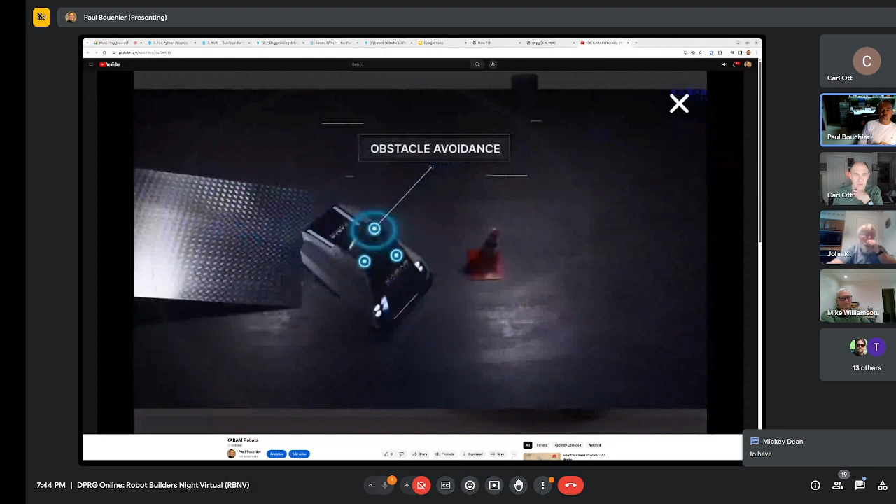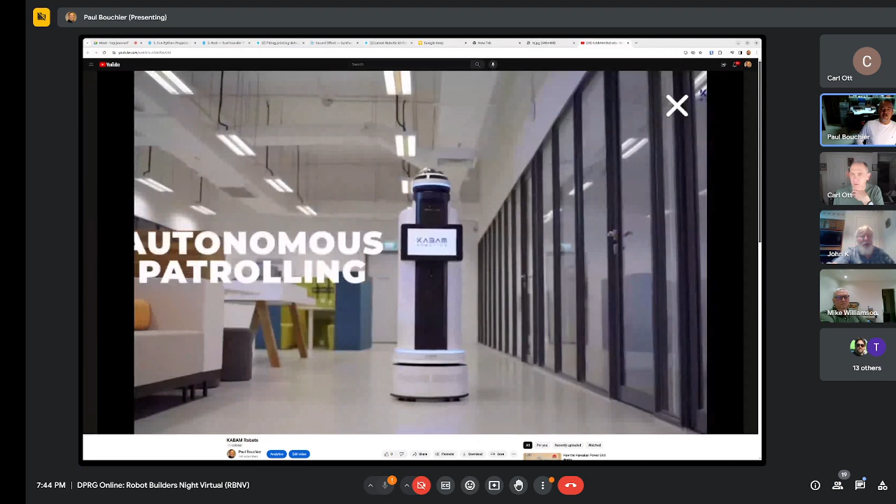Yeah, so I just excerpted a few things from Kabam's website, but Kabam is a Singaporean company that manufactures two security robots, and their VP in the US is going to come and talk to us about the robots on Saturday. So please come to the meeting and or dial in. He'll also be inviting us to come and visit their experience center in Irving. So this is their indoor robot.

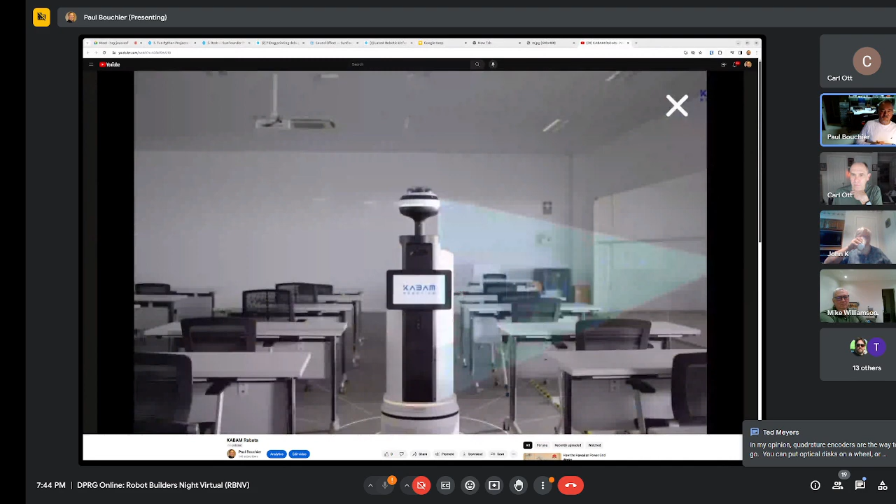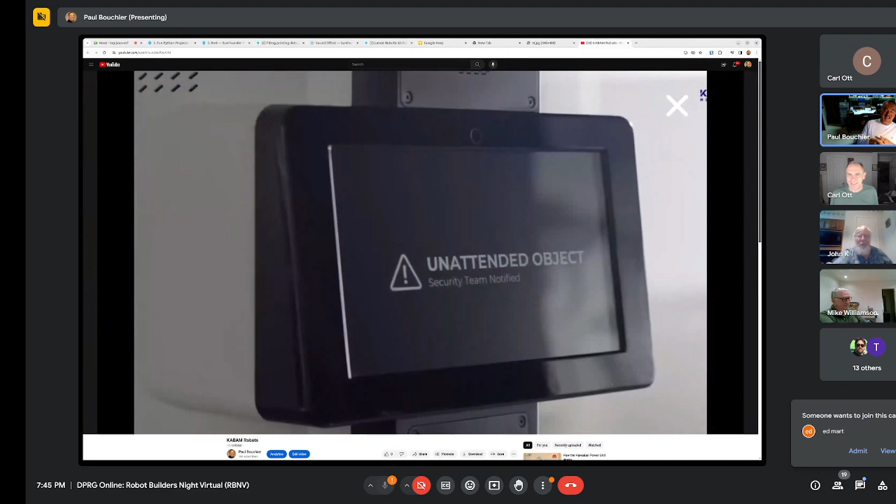So we'll be talking about setting up a date for that while he's there. There will be pizza at lunchtime on Saturday. So anyway, it should be a really interesting presentation, and they're expanding their—I think I love this one, the smoking detector—and there are some interesting things they bring up, like unattended object. Okay, what is the definition of that? So I think we can ask him some real interesting questions, and this group, I'm sure, will have some thoughtful questions to ask. So that's one thing.

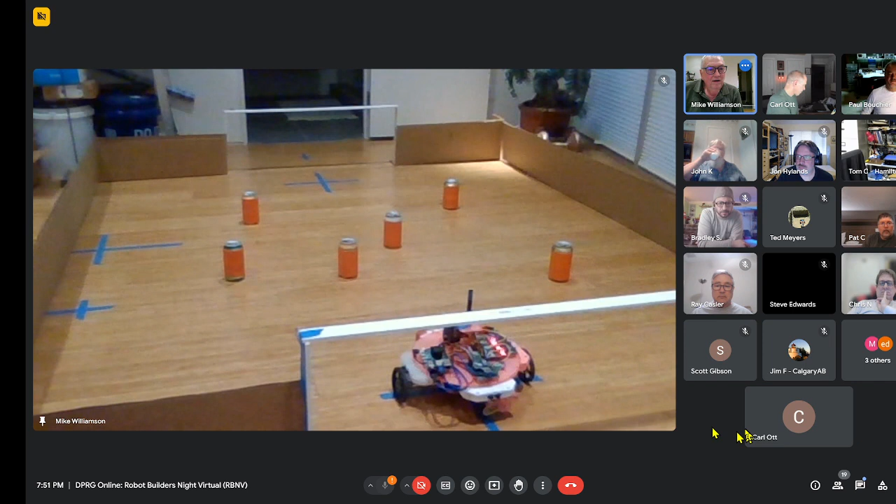Let me try to locate it here. I'm going to try to grab just the RViz screen. Well, this is exciting—real live demos. I love it. So can you see the screen? Okay, so on this screen—oh, I can go to RViz. And I think you can see my mouse. Yep, okay.

So this is the course, a shortened version—it's 7.5 feet long instead of 10. Right now the robot is here, you can see it on the other screen, basically at the start. And I'm using my time of flight sensors to mark what it can see on the walls.

I had to do some adjusting on the time of flight sensors for calibration, because they had a curve to them, and I found a formula using a sine function to correct the curve. Somehow in these time of flight sensors, depending on the angle—it's an 8x8 sensor, seems like a single sensor but there are 8x8 places on it, pointing in different directions, detecting in different directions—when it was straight ahead it had more distance, which was an error, and when it went to the sides it had a different distance. So I had to correct that curve, and now you can see the lines are pretty well straight.

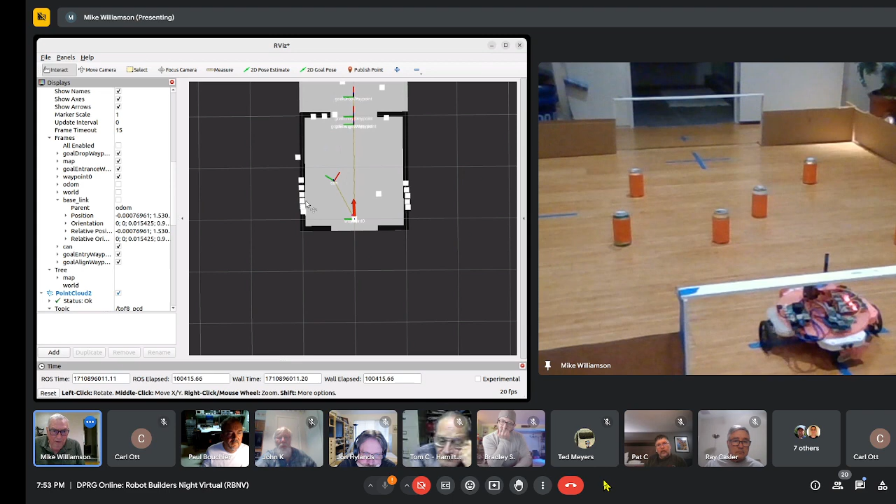And if I go over here and move the robot a little bit, you can see it shows the difference on the screen. If I put it back to where it should be...

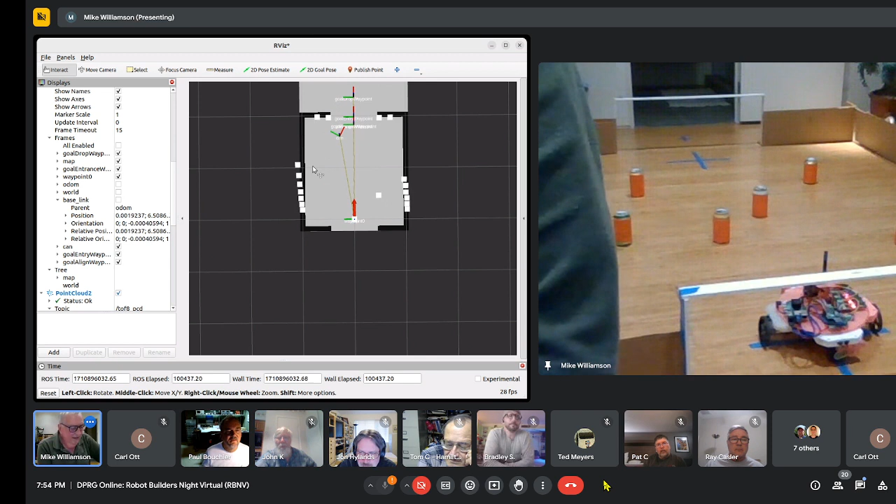There's some functionality in robotics called SLAM—I don't exactly know what that stands for—but what it tries to do: this black outline here is the walls, so it's a map, and this is what the robot sees as where the walls are. When it sees a mismatch, it'll reposition software-wise where the robot should be, because during operation the robot's odometry will drift and it'll start to go a little crazy.

So I'm just going to get the thing running here. Before you kick it off, Mike, a question.

You've got three 8x8 time of flight sensors, and I see there are 8 dots on the left and presumably 8 on the right, and then there seems to be a largish gap before you see the presumably 8 dots from the front sensor. Is there a gap in the field of view that's showing? Yes—when I designed my sensor array, I mistakenly thought they were 60 degrees apart, and I was getting weird results, so I reread the data sheet, and it turned out it was 60 degrees diagonally.

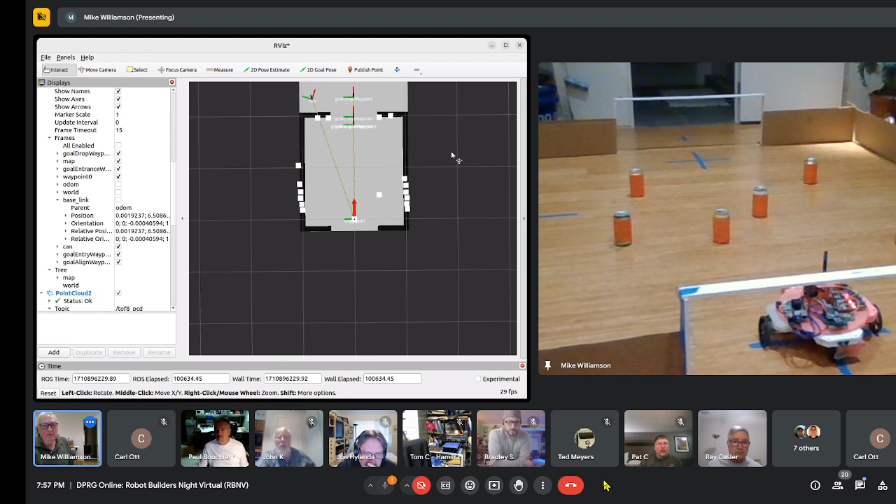So this is the sensor, this is like the fourth one, which is basically almost the middle of the sensor, so it's pointing straight out. Okay, I'm gonna get it going.

Uh-oh. The demo is not working. Oh, hold on a second.

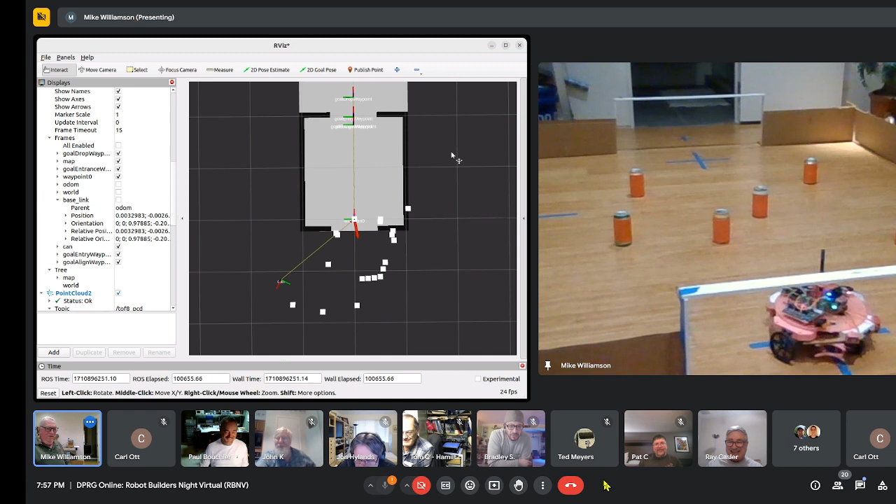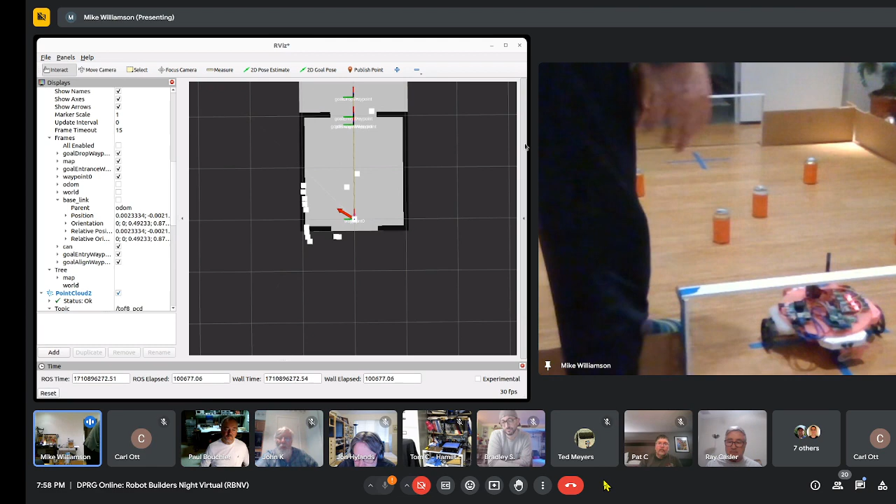When I see this, I have to do something that I haven't figured out how to fix. It seems like the OpenMV camera, when it's spitting out messages on the serial port, if I'm not connected to it all the time, the serial port overflows, and I have no way to control it, so I just recycle the power on it.

See if that fixes it. Yeah. You can do a loop and read it very often so that you don't overflow your buffer.

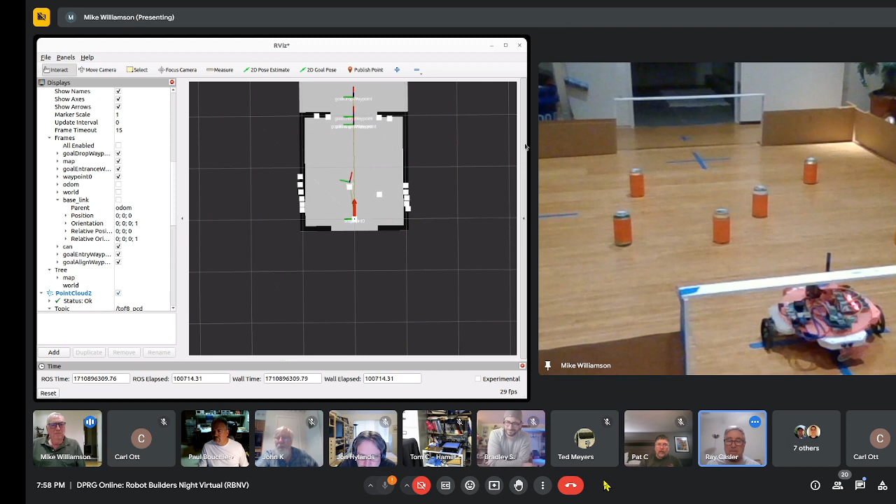Yeah, but if my software is not operating, it doesn't read it. Oh, it doesn't read it. Okay, right, so I stopped the software, reset it. Let's see if it magically works again.

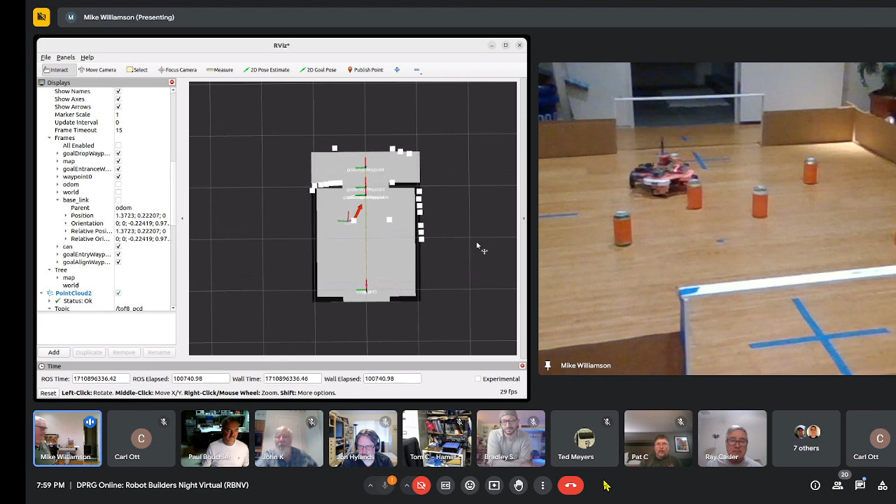Or if you start up, you can clear out the buffer and basically use the latest whatever message you're sending across your serial port. Yeah, I gotta try to sort of figure that out. I'm thinking almost of using the serial pins.

So for those that aren't familiar, what we're watching here is basically Mike's robot practicing a DPRG contest called 6-Can. The arena is a defined space, and we have a handful of aluminum cans coated with orange duct tape, and the goal is that you push the button, the robot has to itself find the cans and take them to the goal.

And as this was a live demo, this is a gold star, am I right? Gold star! Gold star! Gold star for Mike, yay!

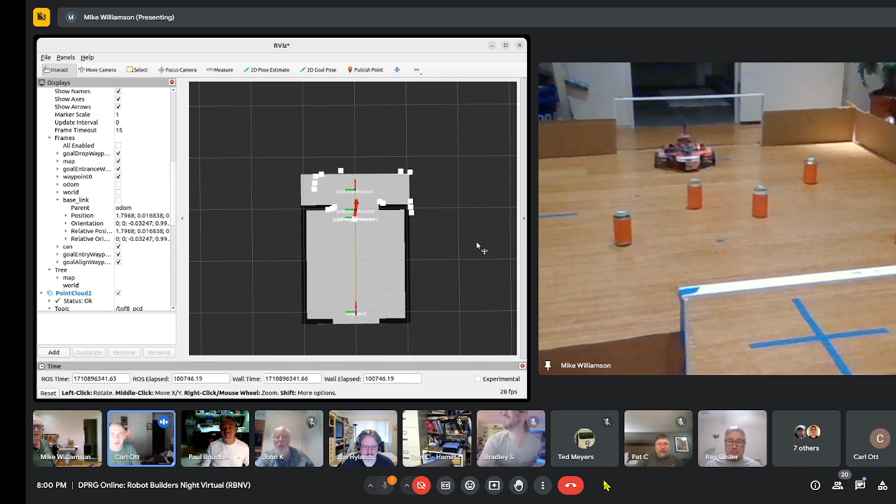Is Mike frozen up for anybody else? It looks like he's frozen, but we're still envious that he was able to get something running and the rest of us are just watching. Oh, he's left, I think he's going to rejoin here momentarily. Yep.

Do you mind me asking to restate the competition? I heard can, like a soda can, Charlie Alpha November 6—is that correct? That's correct. I'll see if I can find the rules and paste them into the Slack. Good man, thank you. But it's basically a soda, a pop can, whatever state you're from and whatever you call it.

Pop if you're from Ohio, right? Yeah, oh, there goes the robot, it's dropping a can off. Thank you, Mike, oh, it's cleared 4 of them, just going back for the rest.

If only we could rewind Google Meet. Yeah, his video froze. His robot didn't. Right, look at how graceful that claw is. Yeah.

Scott Gibson, you might be trembling in your shoes. Is that true? No, I still got him beat on time. Okay, well how do you know he's just not playing you by running it really slow? That I don't know. It's really Ray that should be worried about his second place.

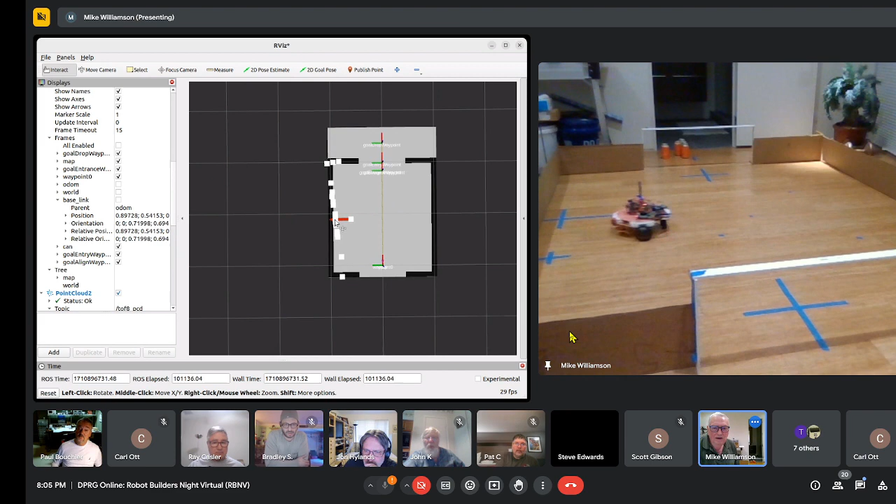Ooh. So, ooh. Unless your video freezes. Oh. How'd the bot go through the wall? Froze up again, aren't we?

Yeah, I wonder if... no, that can't be it, it's faster than that. I think he's using odometry for localization, isn't he? I don't know, odometry and maybe compass, but that would explain, if the wheel slipped or turned faster, why it's now outside the arena.

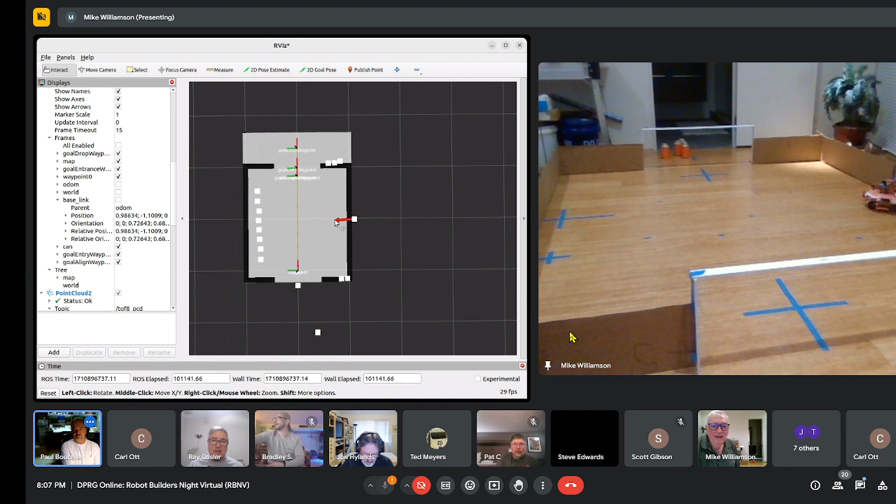It could be he just hadn't updated his position from his sensors.

It seemed like his feed dropped out when he tried to show both the camera and RViz. Mike, it seems like the feed drops out when you show both RViz and your camera, and right now your camera is muted. There you go. Okay, so this other one lost connection. Okay, so I'll just be on this one now.

All right, so that's sort of what I was working on with the time of flight sensors, which I said I'm pretty pleased with them, except during movement. I wasn't really pleased with them.

But I do have a question for Ray, because he mentioned months ago that he cycled between different blob calibrations. Yeah, because depending on the shadows and the lighting and stuff, it doesn't always work. So did you do that in the camera itself and just run it continuously and then picked the one you thought was best and sent it to the software? Or?

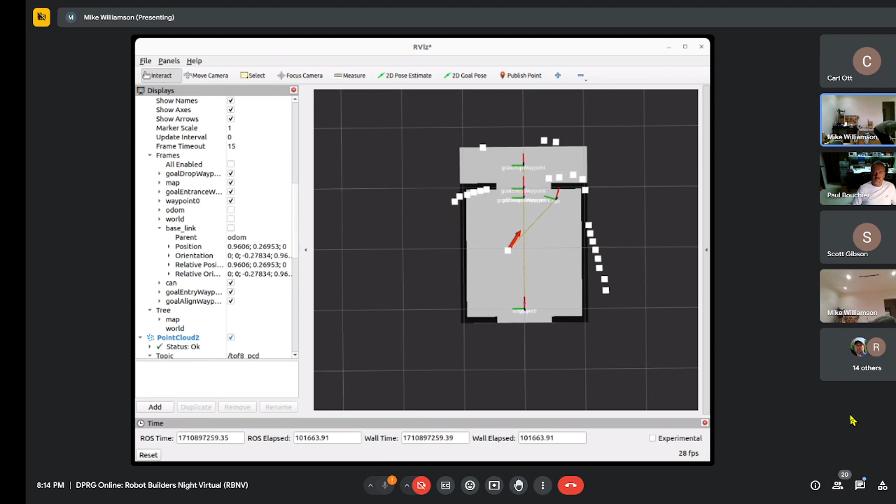If I bring my robot back to its starting point and then realign it, you can see my time of flight sensors, the white pixels, the white dots, and the black is the outline of the course walls. The time of flight sensors see the course walls, and in this opening it sees stuff behind it. When it moves around, it looks like it started off a little crooked. This is called SLAM in robotics and ROS, and somehow they got a really great algorithm that can match this with the wall and figure out what the offset, the odometry slippage, has been. So I'm anticipating being able to do that to correct for it.

It's always a good practice to not just rely on odometry, but have something to back that up with, or to reorient yourself with. And it looks like you've got the data to be able to do that.

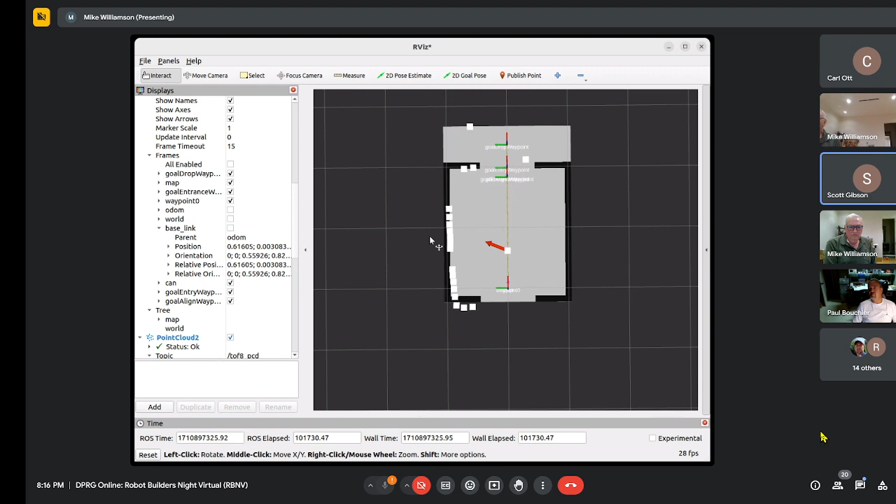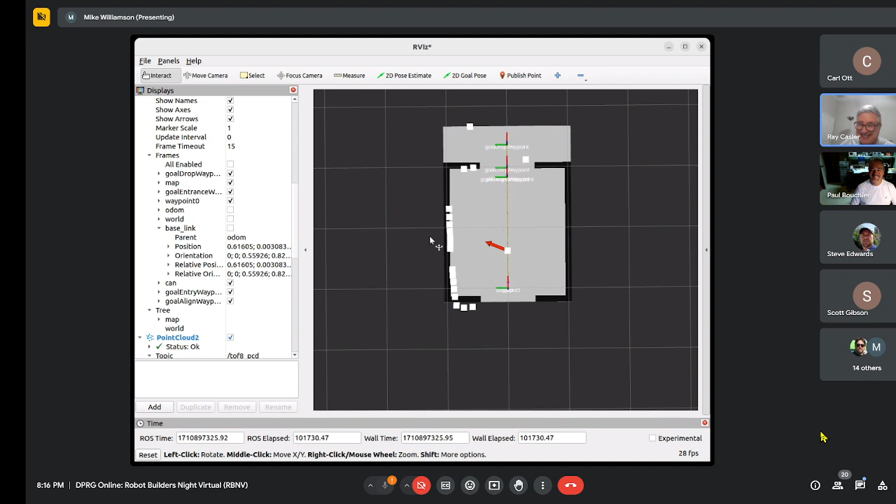That's frozen, I think Mike froze again. Seems like every time he gets RViz going, a little while later his feed freezes. Should have gone for the i9-based laptop, that i3 isn't cutting it anymore. Or Google, I find these browser scraper things just trash your system. I have these 4K monitors beside me, and I have to bring them down to 1080p or else I can't do this. With a 4-year-old i7 and plenty of RAM.

Mike, you're back, but you're muted again. You're muted. Still muted, Mike. Maybe I'm overloading it with two machines, so I'm going to turn one off.

So that's the extent of my show and tell. Awesome, sorry about dropping out and wasting your time. No, it's awesome to see, you're doing great.

Yeah, I'm not using the navigation stack yet. Like the Kalman filter is not part of the navigation stack, I'm using the transformation packages and stuff like that, and the messaging packages, but I'm not using the navigation stack. I think in ROS 2 it's called something new, I can't remember, the navigator or whatever it is, but good old ROS 1 parlance is the navigation stack. I want to be able to use it, but I'm just doing this on my own. It's my DIY navigator.

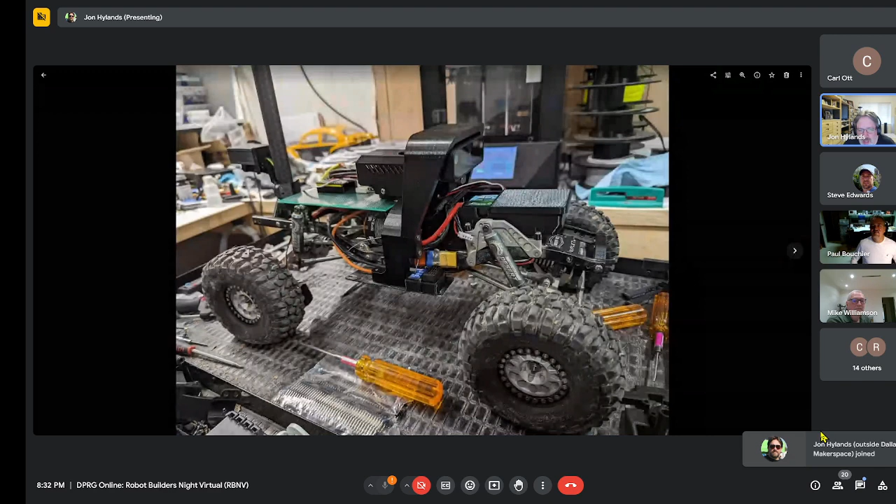It's basically a 1/10 scale hobby grade radio control rock crawler that I've converted into a robot. It has full-time 4-wheel drive, a sensored brushless motor, a high quality digital servo. It's got a Raspberry Pi 4 underneath this 3D printed case here, and an OAK-D Lite 3D range finding camera that also does object detection.

And I'm working on this embedded board right now, the prototype board here. I've got a bunch of stuff soldered to it. This is the main embedded processor, an STM32 F405 running MicroPython. There's also going to be another ESP32, one of the Seeed Studio ones, which is going to be my fail-safe. This bar up here is a carbon fiber tube. Up at the top of that is my 9-axis IMU, and hanging off the back of that is my GPS and some LiDAR sensors for helping when I'm backing up.

Did you mention what chassis this is? It looks like a pretty beefy chassis. It's an extremely beefy chassis. This is effectively an aftermarket Axial Capra, but it has aluminum Vanquish axles, which are machined from billet aluminum. They're not like cheap stamped Chinese ones. They're ridiculously expensive, but they're also completely bulletproof. So yeah, it's basically an all metal chassis.

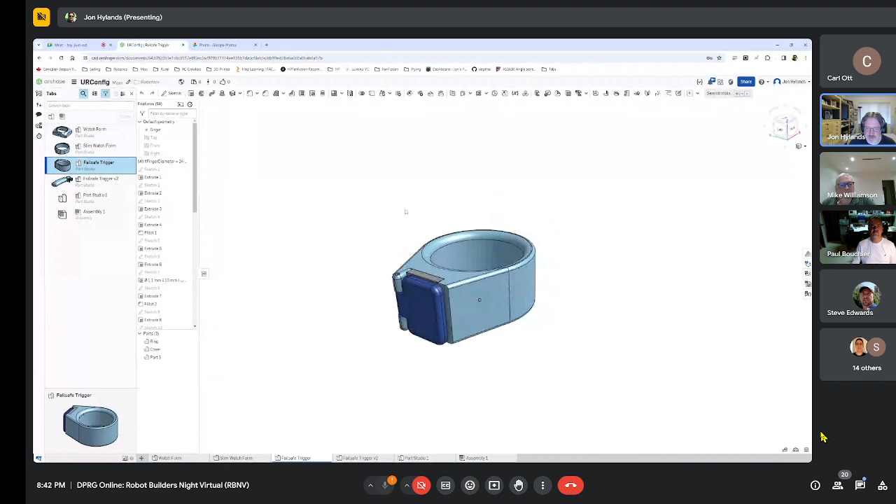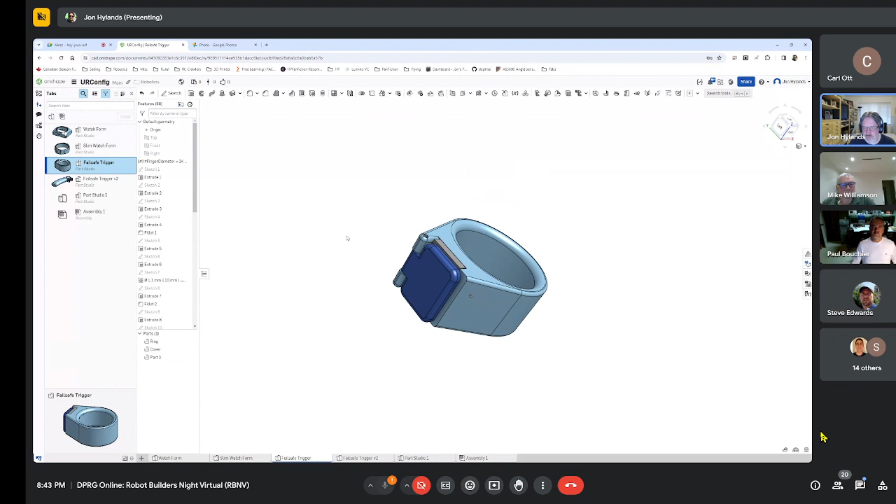Here I'll just do a quick presentation for a second. Share, boom. So this is Onshape, which is what I use. I've modified my model but haven't printed it yet because I'm in British Columbia visiting my parents' place, so I don't have access to my printer. But I've added a big flapper to the button so it doesn't hurt as much when you hold it for long periods of time, and that's just pivoting on a pin with the button underneath it.

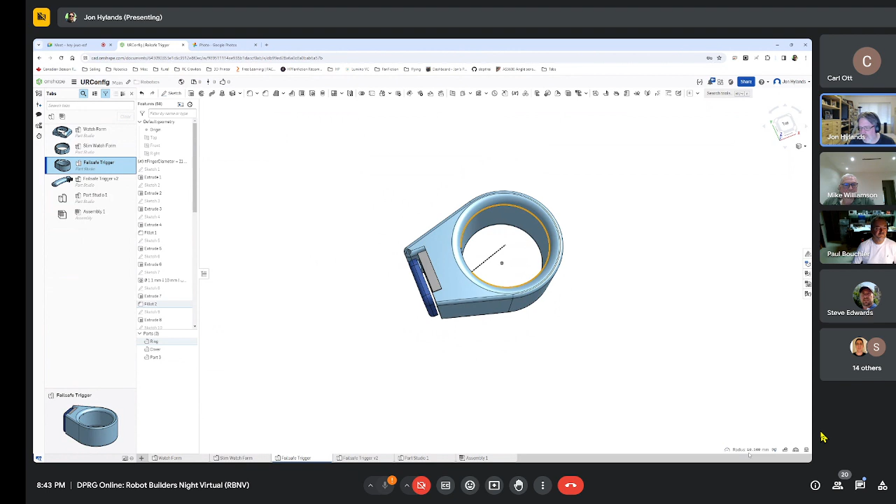This diameter here, I can generate it, it's just a variable, so I can set this to be 21 millimeters because somebody using it has a really small finger. So now this inner circle, the radius is 10.5, so the diameter is 21 millimeters, and you can change this to be whatever you want, and it automatically resizes everything so that it fits.

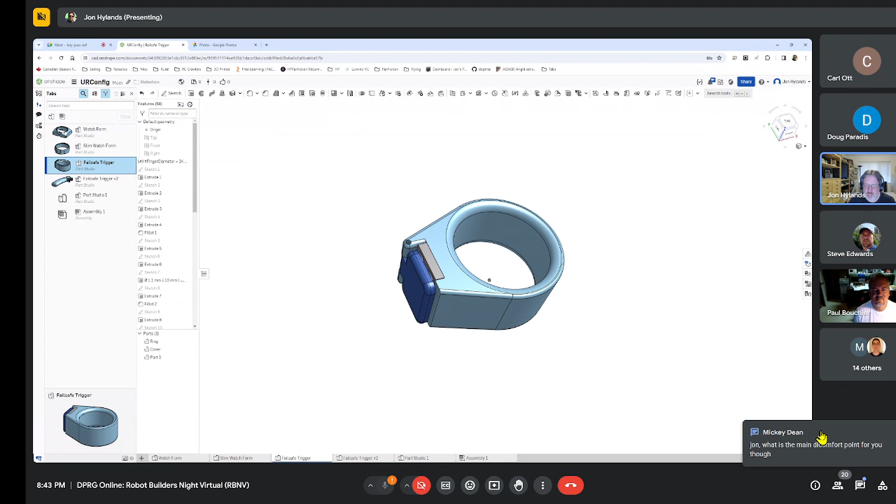I have big hands, so the one I actually printed is 23 millimeters, but it's a little bit on the tight side, so I'll try a 24 and see how that works.

Jon's presentation brought up something for the competition in April or June, and that is the 5-corner. How do we get coordinates where the robot's supposed to go in the room? There's a 5-corner where you have 4 corners of the room plus the center, and you're supposed to be able to navigate to those 5 positions, avoiding obstacles and everything.

Yeah, so I'm just saying, is that something you know ahead of time? That's what I'm asking, yeah.

This has a USB port, right? You program it in MicroPython, so you connect it to your computer, and it has a file system built into the flash. So you can take a JSON file, stick whatever you want in it, copy it to this device from your laptop, and read that file when running the code, which is how I did that GPS thing where I showed those icons. That's literally a JSON file with 5 GPS coordinates, latitude and longitude in it. So my question is, when we show up for competition...

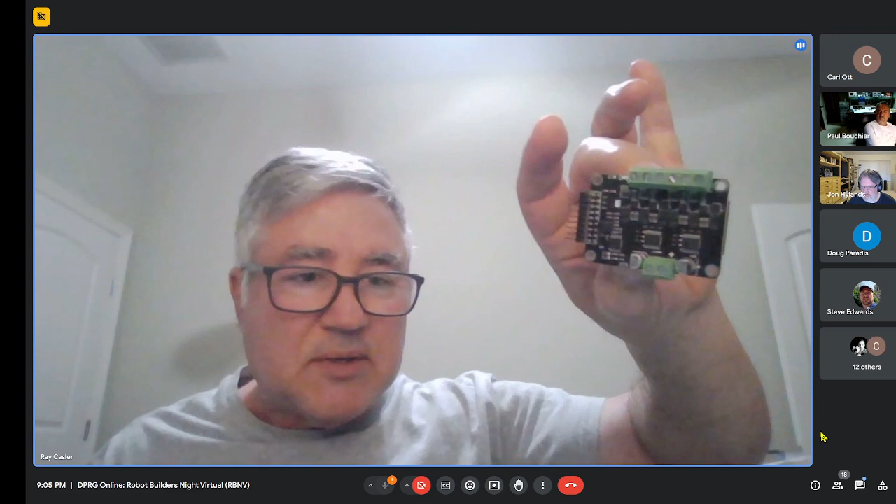Yeah, so it's a little cruder. I don't think you can do some of the position control and stuff like that. And there's other ones that actually sense the current in 2 of the windings, like this one does. And I found out that these actually have, what is it, 4 MOSFETs for a half bridge, and it'll drive 2 motors, and it's got a socket for an ESP32 on the back. And these will actually measure the current of 2 of the legs of 2 motors.

So you can do torque control with that. As far as I know, I cannot do torque control with the DRV8313s. They don't sense current at all. Well, actually, they have the ability to do it, but these boards don't use that capability.

So, are you using the SimpleFOC Mini board for that, with that driver chip, or some other board? Yeah, it's a SimpleFOC Mini, but okay. Yeah.

And this board actually has, it's 2 channels, basically an op amp. So you can actually use a very, very small sense resistor and boost the voltage up and translate that as a current.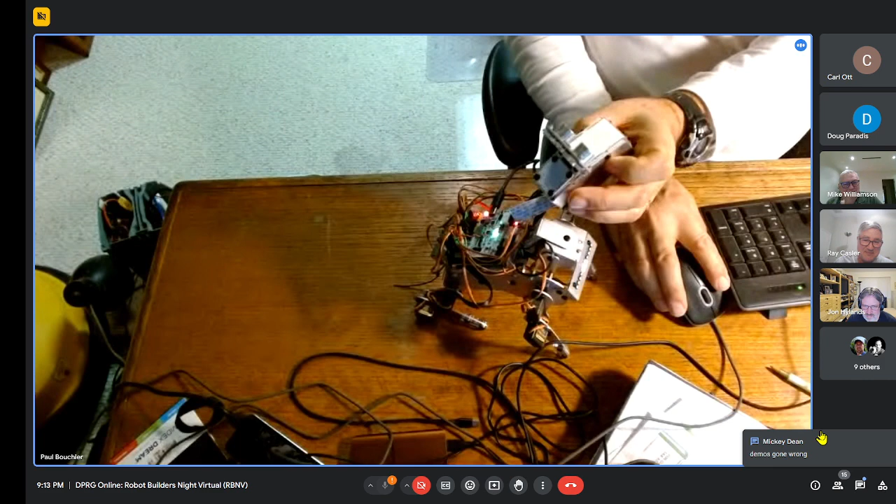No, it broke the servo. Okay, let's see. I'm gonna share my screen to show, because it's got a little web server. Poor PiDog with his decapitated head. I'm going to share. Well, that camera cable's a Timex - took a licking and kept on ticking, huh? Yeah, so let's see.

Yeah, it looks like it's trying to track. So this has got face recognition, and it'll draw a blue box around - I see it, around yeah, me. There you go. Yeah, that's not very... I think the problem is you've got a big light behind your head. Yeah, that light may be too bright. It just doesn't seem... Yeah, Paul, on mine it worked a little better than that, but I don't think it's super robust. I think that's an opportunity for the user to put a little more robust face tracking in it.

Okay, the object recognition is even worse. But it does work, so that means probably what you really need is one that's trained properly.

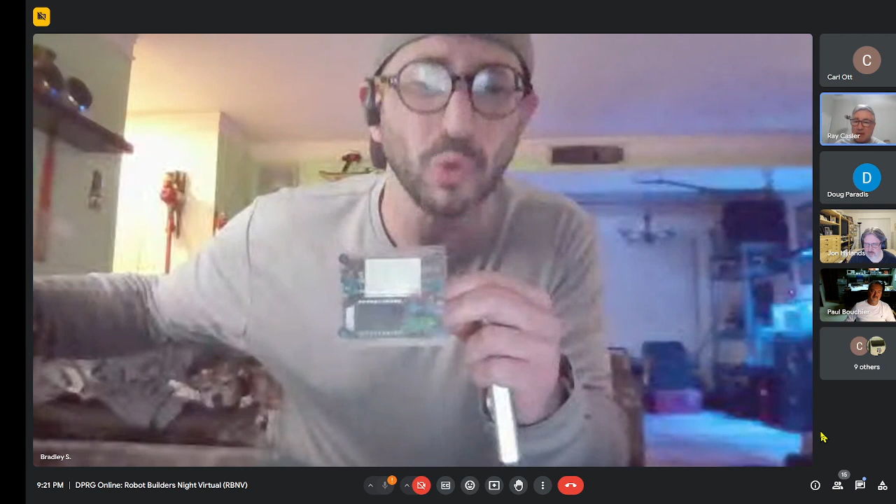You can, I think it might be good for maybe an amp or so. I think they always seem to overstate them, but I don't know if they have like forced air trying to keep the thing cool enough so you can get its rating, but it seems like they're always a little overrated. Yeah, right, looks just like that. Well, similar to that, not identical, but yeah, those are pretty handy.

It's kind of nice just to know what current it's pulling, and I really like it, I use it to power a lot. Yeah, this one, instead of volt, it says VOL. I don't think they hooked up the T, the T never lights up. So, special price, no T.

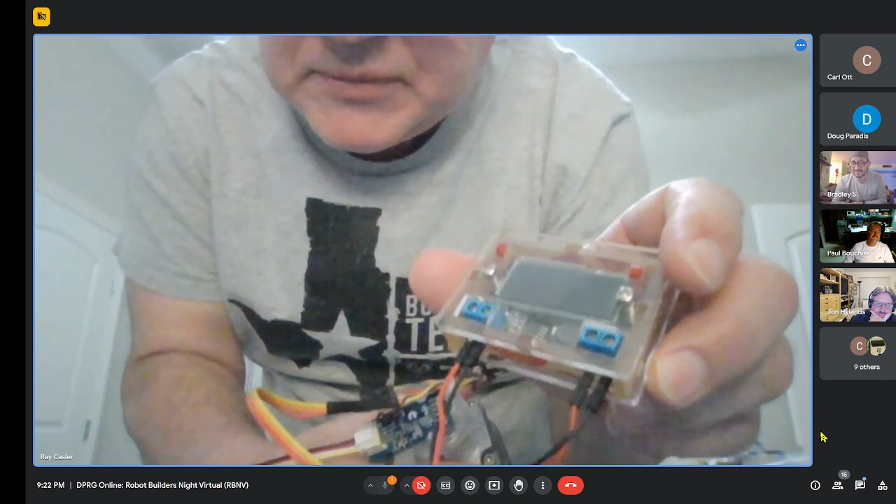Ray, can you just show what you're talking about so everybody sees? Okay, I'm just a little lost here. Yeah, they're just small DC to DC converters with a display. Oh okay, let's see here. Here's one here, it's got two connections for in and out, and a little display, and two buttons you push up and down, and it sets the voltage. So it's really just a constant voltage DC to DC converter.

So it's not set to just 5, it could be, you could do 3.3 if you wanted to. Yeah, in fact, I'm doing 3.3 on the other platform right now. And at least some of those are adjustable, via little potentiometers on them. Yeah, some of them have potentiometers, those have buttons. Some of them also have a current limit, so you can use them as a constant current source, or at least kind of limit the draw from your battery.

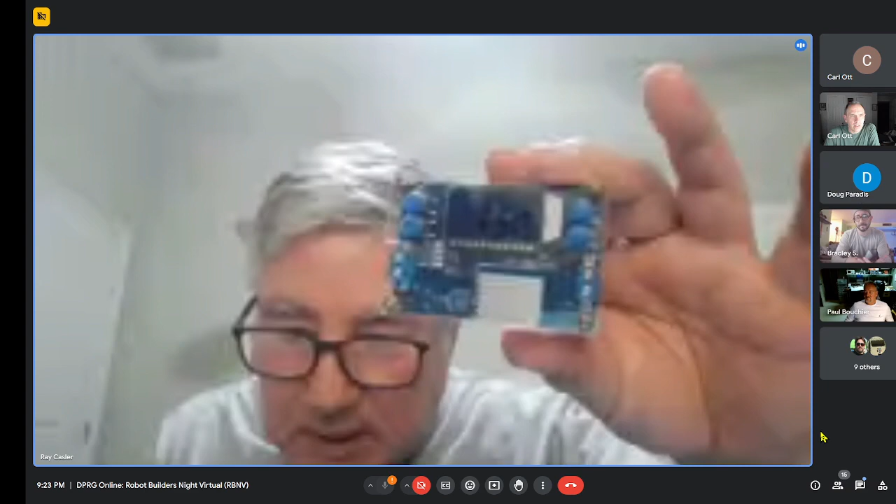Yep, there's another one. This one actually has 4 buttons. I think this one I can use as a constant current source. Can you drop a link? That one looks nice, I don't know if it's any good.

Yeah, this one will do battery charging. It's got a little LED indicating that you're in constant current mode and whether your battery's fully charged, and can show input voltage, output voltage, and be adjustable. That was an AliExpress thing. I actually bought 5. They're all supposed to be, I think, 2 amp, and I got one that was like 12 amp.

They just said keep it. Yeah, this one is the 12 amp one. I don't know if it'll actually do 12 amps, but you can see the difference in the size of the heat sinks. Much bigger. And they all have a little LCD display. So this one's the 12 amp one. I think in Amazon, well, I can put it in the chat what the part numbers are.

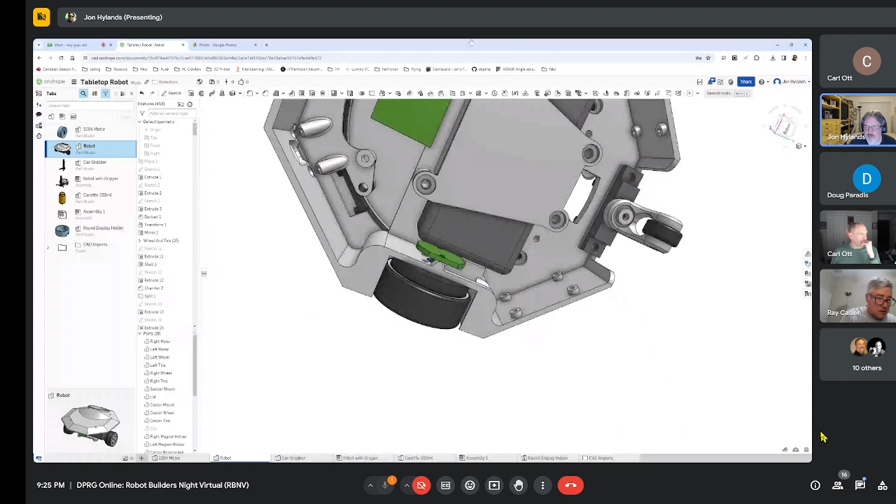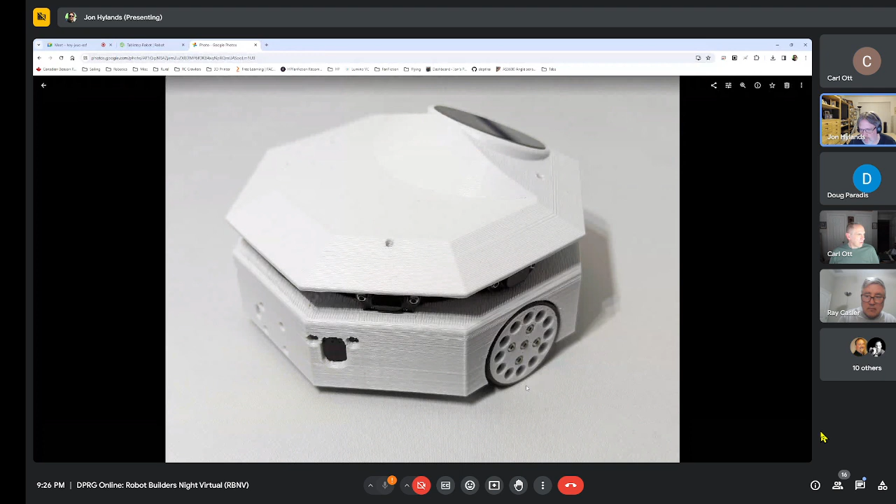So this is another robot that I was working on. I put it on the shelf for now because doing too much. But it's using a couple of those brushless motors, and this white part is 3D printed ABS, and this is what it looks like in real life. And then the black is a TPU, sort of rubbery kind of tire, and you can see the bottom of it.

Take a picture of it here. So it has the SimpleFOC Mini driver board and the magnetic sensor encoder board, and then this is the part of the brushless motor that doesn't turn, and the part that has the wheel on it is the part that does turn.

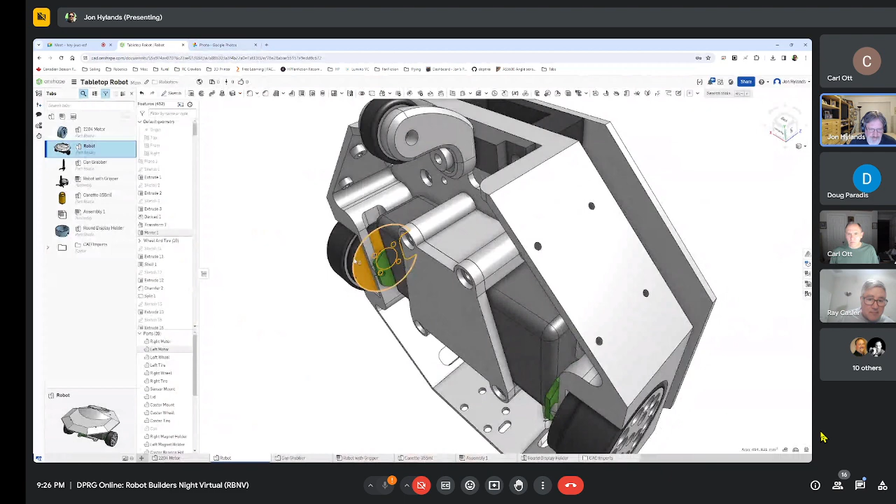And that's all hollow. So if you look at this from this side, if I get rid of the motor, so this is what the wheel looks like. It's pretty simple. And then the tire.

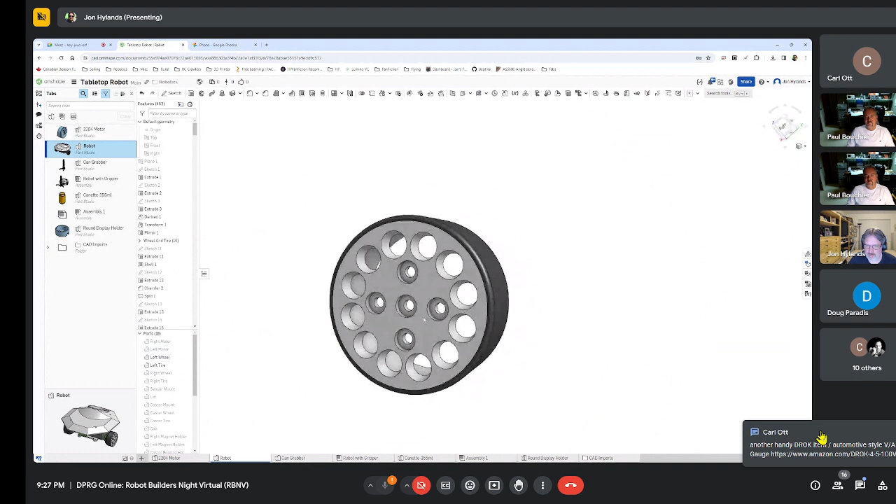Do you have a good source for those little teeny screws? Because that plate is not that big. Amazon, these are M2 screws. If you look at these ones here, they're M3s, but a lot of these are M2 screws that I use on this. And if you look at the robot itself, these are...

It can only be like what? These are M2 screws, long. I think these ones are 4, they're 4 millimeters. You can get from Amazon, you can get a kit that's got a whole pile of different sizes of M2 screws. So I bought, it comes in the little Ziploc bags, and there's a whole stack of different lengths from like 3 millimeters up to about 20 or something.

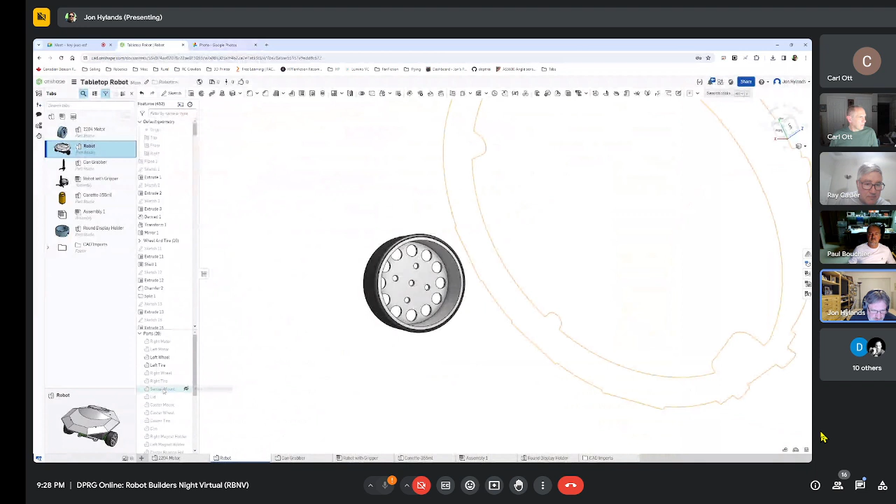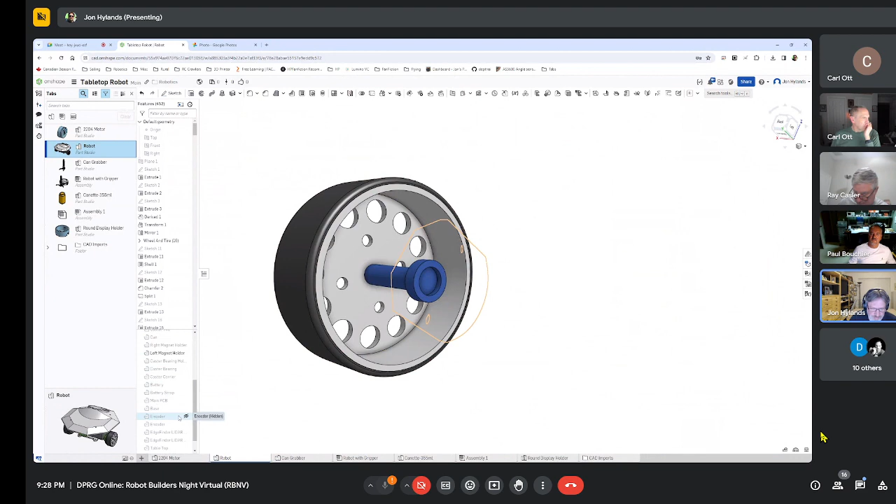So yeah, this center one holds, there's a little 3D printed piece that slides into the wheel, which, let's see, what did I call that in the model? The magnet holder. So that actually goes into the motor, and then there's a little radial magnet, a disc magnet that sits in there, and then the encoder board sits right in front of that, and so there's actually a chip on this board that sits about a millimeter away from that magnet, and that is close enough to make that work.

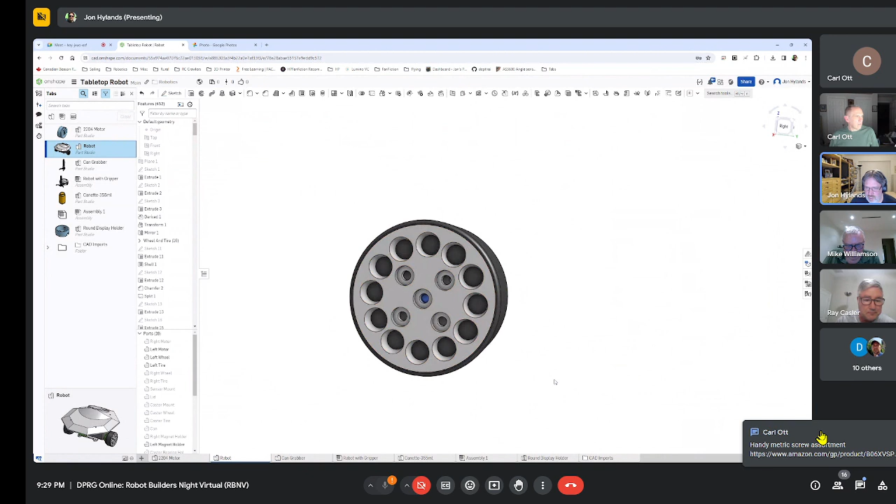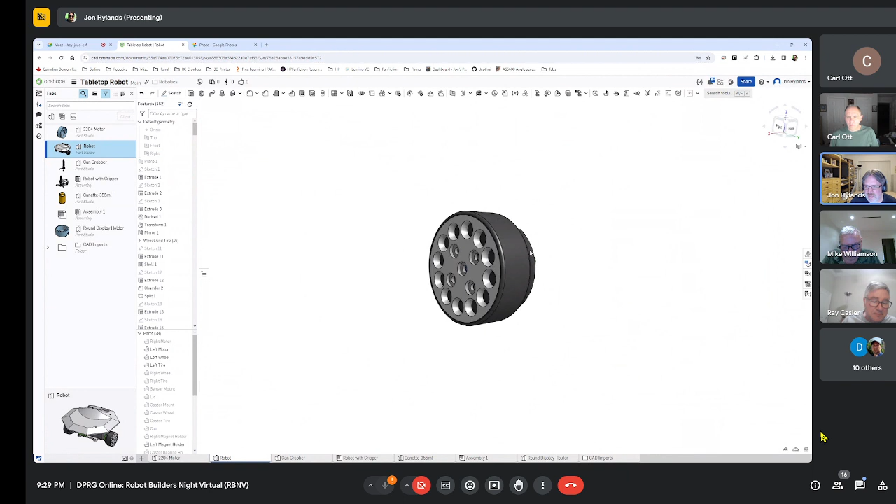So that's what I ended up doing for wheels and tires, just an ABS wheel and TPU tire. My plan is, when I get back to working on this robot, probably this fall, I'm going to make a mold and pour some silicone for the tires instead of TPU. Yeah, TPU is still kind of stiff, so it'll probably slip a fair amount on really smooth surfaces, whereas silicone will be a lot softer and give you better traction.

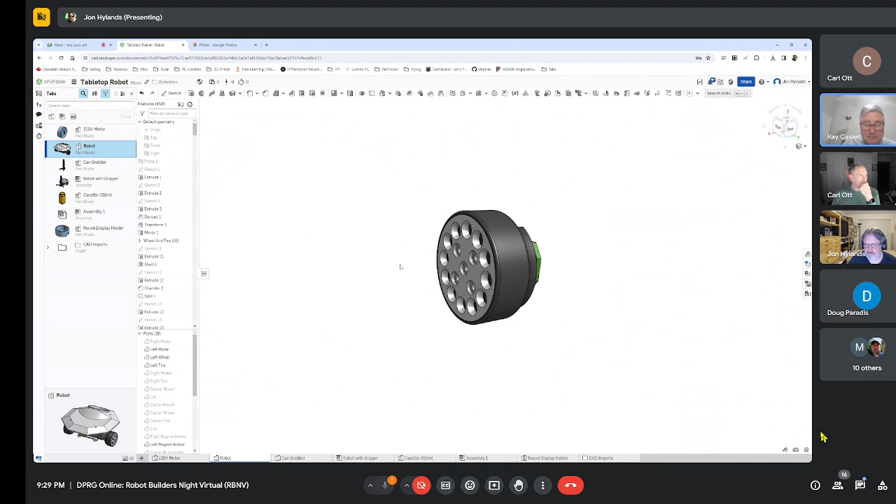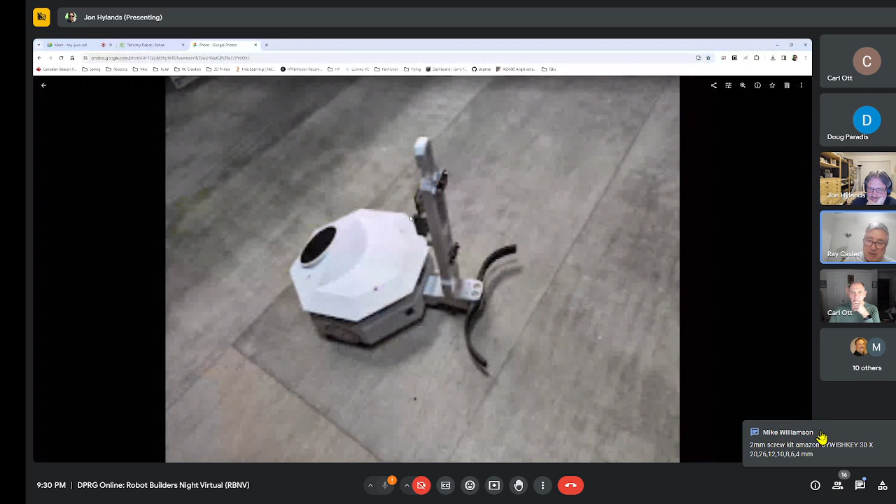Yeah, I didn't realize the very extensive world of rubber bands, but you can buy several different widths, several different diameters, several different thicknesses, and a lot of them are used to hold stalks of broccoli together. And some of the places, it's like, okay, you can buy a 5-pound bag of these things, and it's like, okay, those things are just going to rot in the bag. I'm going to use 2 or 3 of them, and all the other ones will stick to each other eventually.

Yeah, it's amazing how the quality can vary, because some of those rubber bands can last. I've got some that have lasted decades, from the RC plane days in the 70s, they're still good and stretchy. And then the ones that come on the celery, they're not stretchy after 3 months, they're gone. Yeah, yeah.

I went and looked at Office Depot, Office Supply, every place I could, and that's where I came up with the Harbor Freight O-ring solution. So yeah, that link - I mean, it's Amazon.ca, but you can probably find the same thing on Amazon.com.

That's the M2 screw kit I was using. You get 600 M2 screws of different sizes.

Actually, I think that's one of them, and there was another one that I did, a button head screw - one of the screws that holds the AS5600 encoder board to the back of the motor. It's very small, this little thing where the head is tapered - countersunk, yeah. Anyway, I was taking it apart, the thing bounced on the floor and went to Neverland. I never found it. Yeah, I bought a whole kit of those too, in different sizes.

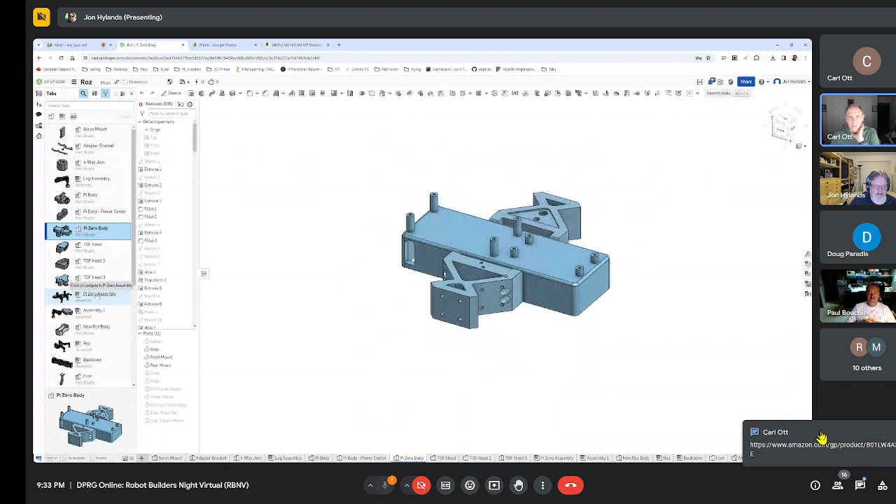Jon, didn't they also have a printing service where you could export from the tool and have them print it and mail it to you? They might, I don't know - I've always had a 3D printer, so I've never used anything like that.

So this is a CAD 3D model of my walking robot, and this is actually an assembly. So the parts are - you can work the parts to figure out what your clearances are and things like that.

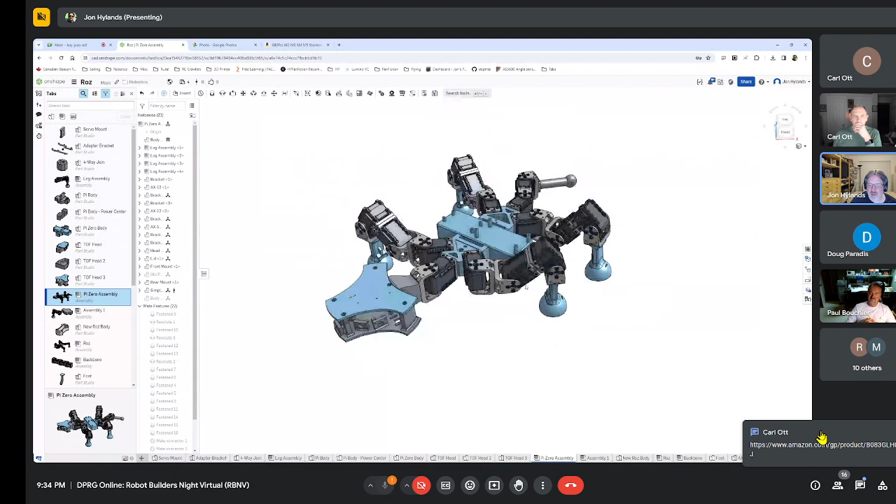Stuff like that. So yeah, I do everything in CAD before I do anything. My Robo Magellan robot - I didn't do the whole model of the robot in this, but let's see.

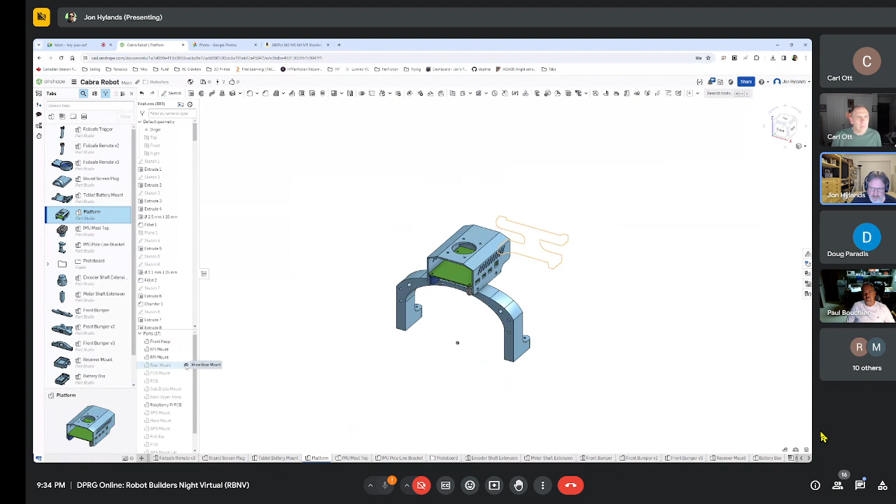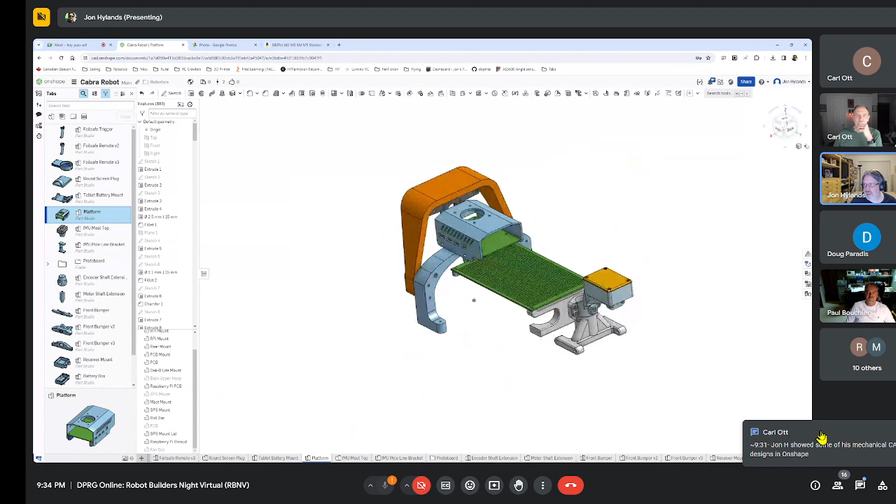This is the PCB mount, the PCB that - so there's a whole pile of different parts. These are a lot of the parts that I have on my Robo Magellan robot. Like this piece is the shroud for the Raspberry Pi. So this board here is sort of the same size as a Raspberry Pi, so it's mounted on these things.

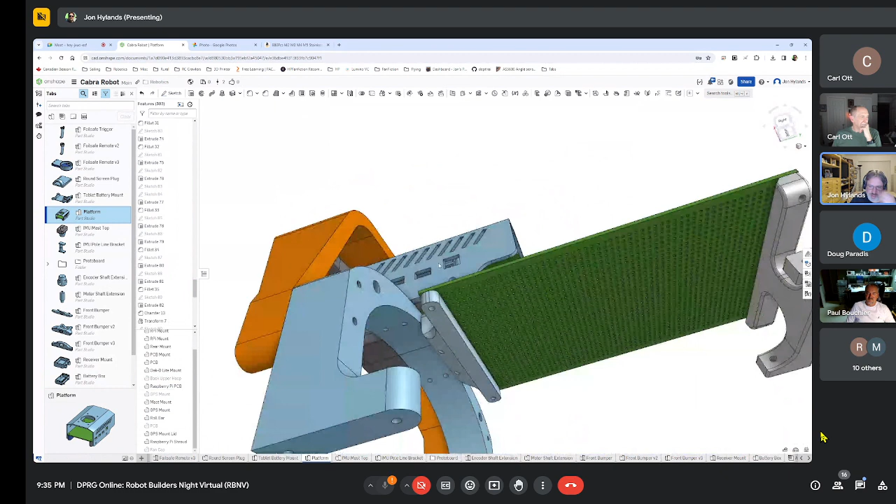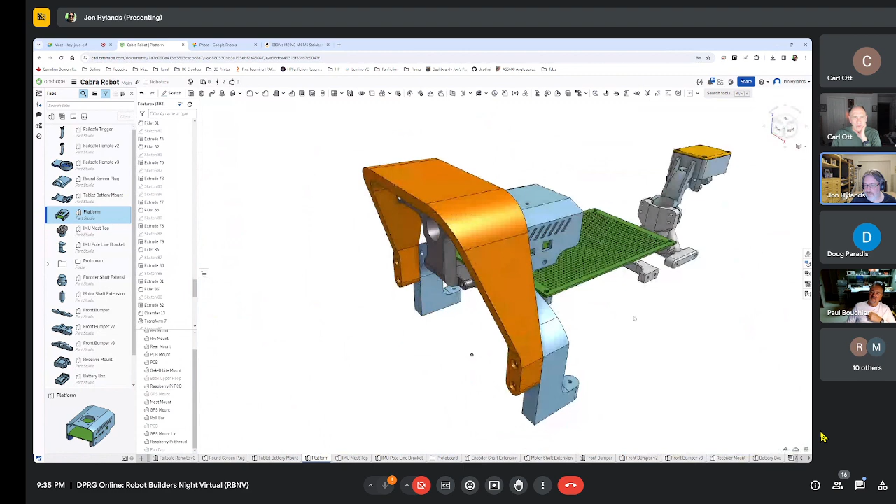Because I print everything in ABS, I can use machine screws to hold it all together - I actually drill and tap the ABS directly. These are all held together with M3, mostly M3 screws on this one, although the Raspberry Pi uses M2.5 screws. But yeah, there's all of this stuff.

This whole thing should look kind of familiar - this is my GPS holder. Hey Jon, do you print the holes and then just tap them so the holes are in the right place? Oh yeah. Yeah, well, I sometimes drill them out.

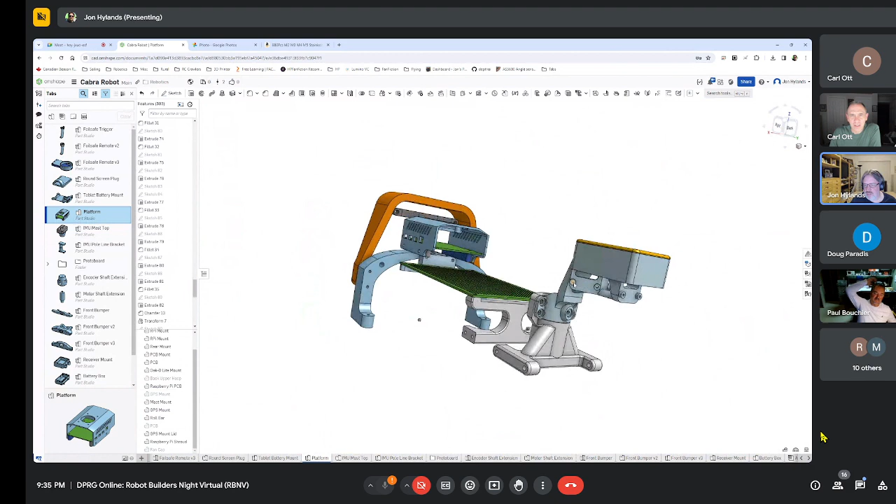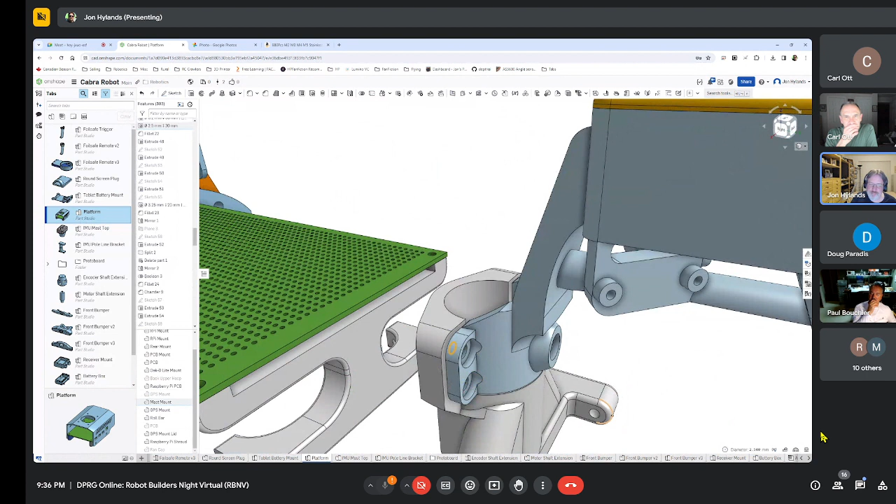For the M3 ones, they work pretty well because M3 is a pretty big size. I print them - these are actually M2 holes, but these ones here are M3 holes, so I make the hole 2.5 millimeters. And then when I print it, I can just put my tap in a drill and back it out, come back out again.

If we go back to here - that sounds like a pretty handy technique, actually. Oh, it's incredibly - yeah, I don't use nuts for anything. You strip anything out, you just print it again, who cares. Yeah, exactly.

So you can see, all of these things are just held on with screws. There's M3 screws that come up through the bottom of this metal plate and then thread onto this piece, and so that is this right here.

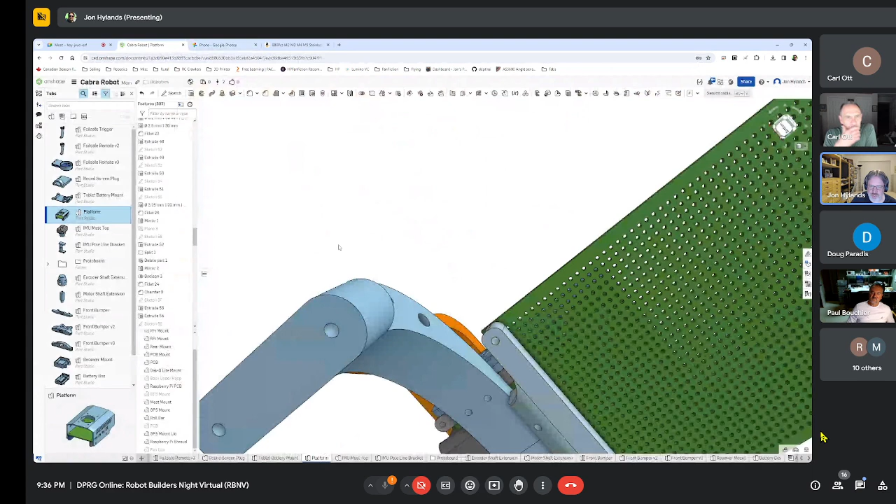So there's actually 2 holes in the bottom of this, which are 2.5 millimeters, and so I tap those to M3, and then I've got screws coming up from the bottom to hold this whole thing in place. These are really long screws. If you look at this from the back, you can see the ends of the screws just sticking out there. These are like 35 millimeter M3 screws. I guess with all that length you've got enough structure. This is going to be pretty strong too, right?

Oh yeah, and ABS is really strong to begin with. It's much more flexible than PLA. PLA is really hard and brittle. ABS is a lot more flexible, which is why you can tap it without overheating and stuff. So yeah, I don't use nuts. Some of the RC parts, because they're metal, use nuts, but I don't use nuts for any of my stuff. It's all just 3D printed.

So yeah, you can see I have screws all over the place holding the stuff together. Even nylon screws. I bought some nylon screws for the IMU so they wouldn't interfere with the magnetometer. I do the same thing with PLA and PETG, and it seems to work. In fact, I don't even tap my holes, I just put the screws straight in them. Just run it on in, huh? Yep. Do you use M3 screws, or the sheet metal type? No, I use M3 mostly.

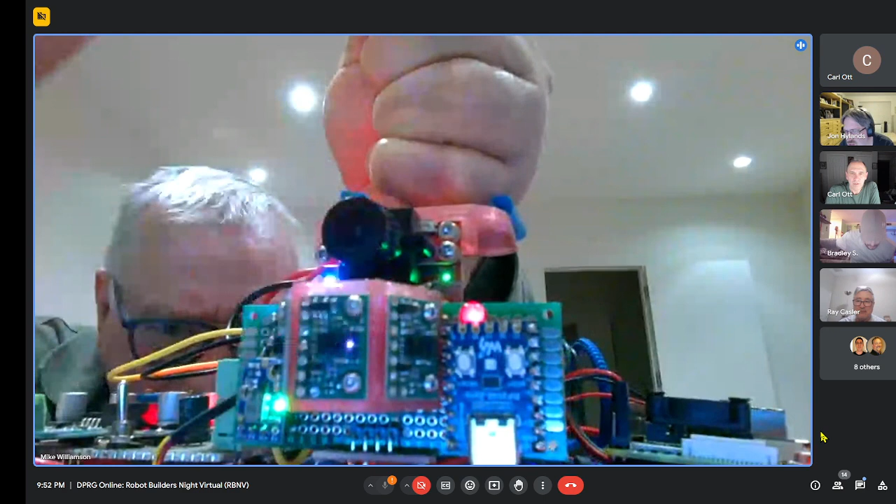Are you using I2C or SPI? I2C. Okay, so it's just waiting until the measurement's done? It doesn't wait, but it polls it. It says, measurements are all done on all 3 sensors, grab them all and send them to the Pi. So it's just waiting for the sensors to be finished.

Are you running in fast mode, like 400 kilohertz, or megahertz? Oh, okay, yeah, they do up to megahertz. But once I grab the data out of it, it starts all over.

Yeah, it's pretty fast. There's not a lot of overhead, I use the Raspberry Pico. I'm writing it in C, so it's fast. But all the code in the Raspberry Pi is Python.

But how are you sending that data to the Pi over a serial port? USB serial. At what baud rate? It's just super. I run it at 115, but I could probably run it at 1 meg. It's USB serial, so it runs as fast.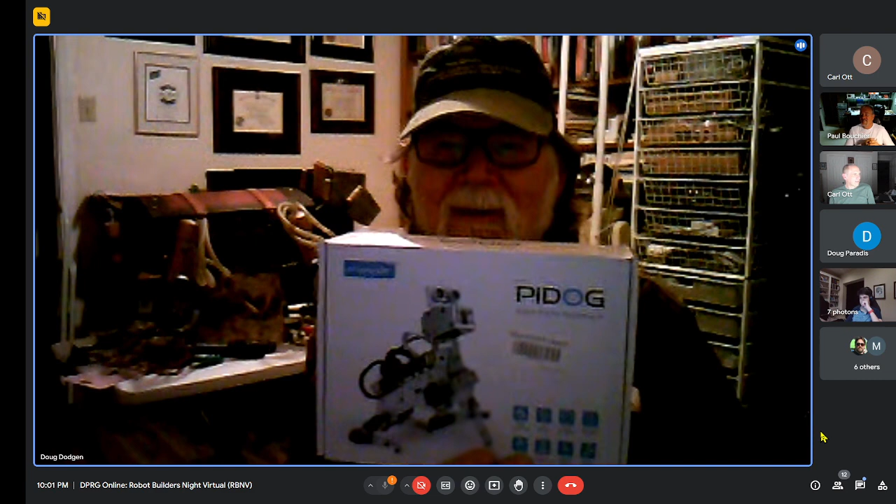Interestingly enough, as long as we're just chatting, when I get this puppy done, V2, I'm planning on... he's such a slow-looking walker watching him walk at your screen. I want him to step onto a platform that has wheels, and the wheels can drive him around like a sled, we'll see how that works out. But did you see him trotting, like when I showed him trotting last week? Because he goes pretty fast when he trots.

Oh no, I don't think I missed that. I had to leave the room a couple of times, I probably missed it. Yeah, no, he trots along good. He won't trot on carpet, but he trots pretty well on a hard surface. Well cool, I'm gonna be busy putting him together next month after I finish this April 6th thing. It's a fun project, fun thing to assemble. And that's all I had.

Jack, what was the question? I was wondering when the meeting was, I think I heard something about an in-person meeting. Yeah, October 23rd - I mean, no, excuse me, March 23rd. March 23rd at 10 a.m. at Makerspace. I don't know that I'm going to make it there. This coming Saturday. Yeah, week from Saturday, right?

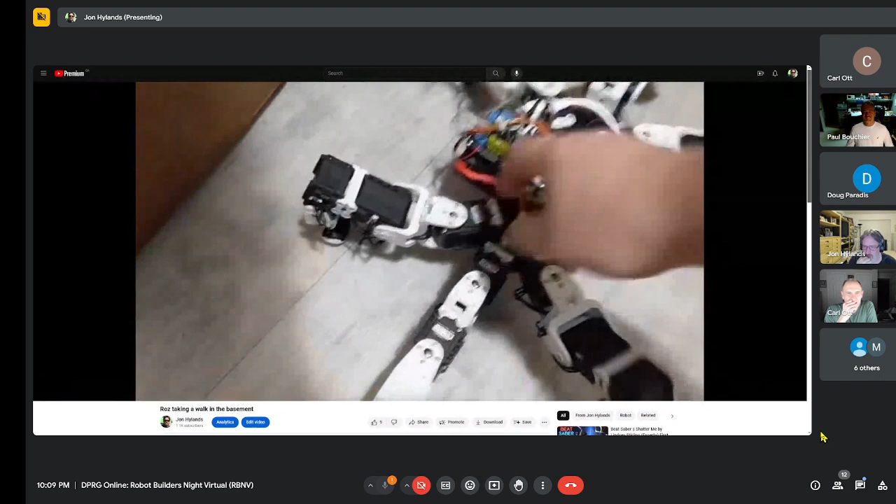I like your 6-legged robot, that's very cool. I don't think it's quite as fast as a person walks, but it's getting there. It gets kind of funky on carpet sometimes, too.

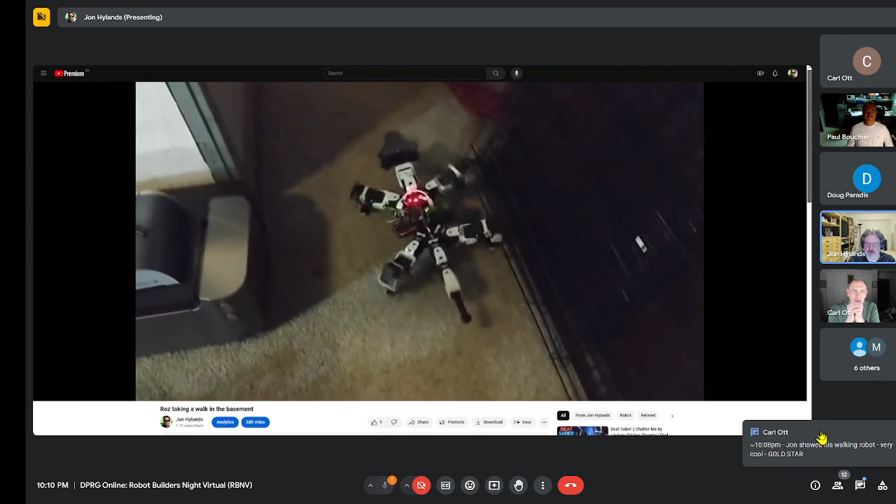Yeah, it's doing real-time inverse kinematics and obstacle, not really obstacle avoidance, more just trying not to run into things. And Doug, the PiDog doesn't do that sort of look for open space and head towards it kind of behavior, or at least the apps they ship it with don't do that, do they? That you know of? Not that I know of.

Oh, I have, it's only got one sensor that I know of, the ultrasonic. And on my particular version, for some reason, I can't get the ultrasonic to work, so I haven't really explored that.

There's no reason why you can't, because you can move the head side to side. Right, and when it's on patrol mode, it moves its head side to side. So you'd think you just have to read it, it's emitting the distances to the terminal. So I would think a version of that program might do what you want. Yeah, okay.